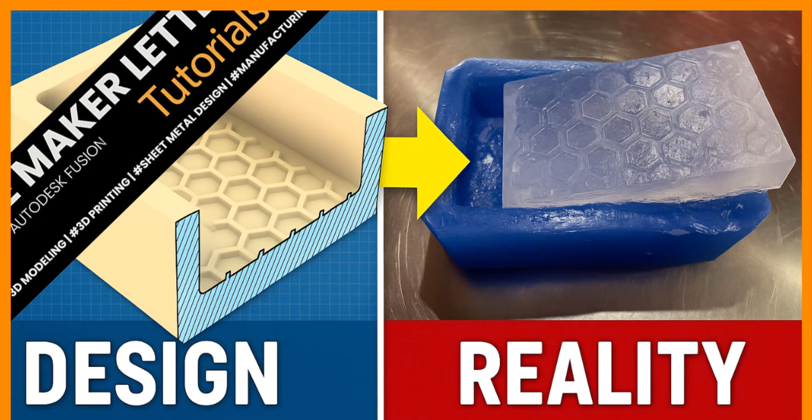Custom molds are fun, and people actually buy them. Today, we're making a silicone honeycomb mold, and I'll show you what I learned along the way.

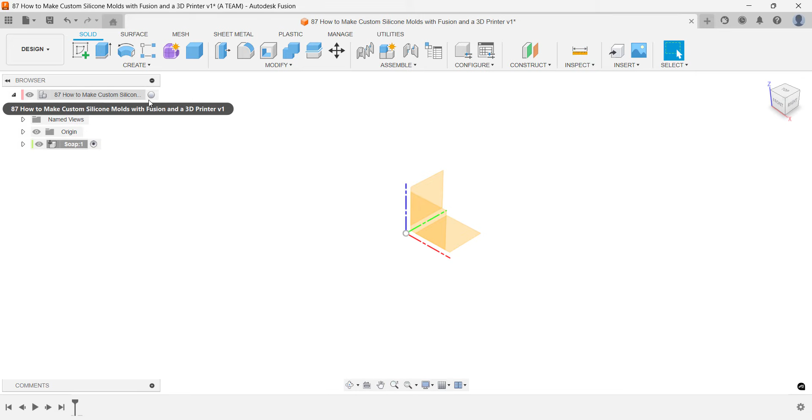Start by following the first rule of Fusion. Create a new activated component for your soap. We'll begin by modeling a digital version of the soap, then move on to designing a 3D printed mold. That mold will be used to cast our silicone mold. And as always, you'll see the keyboard shortcuts pop up in the bottom left corner throughout the project.

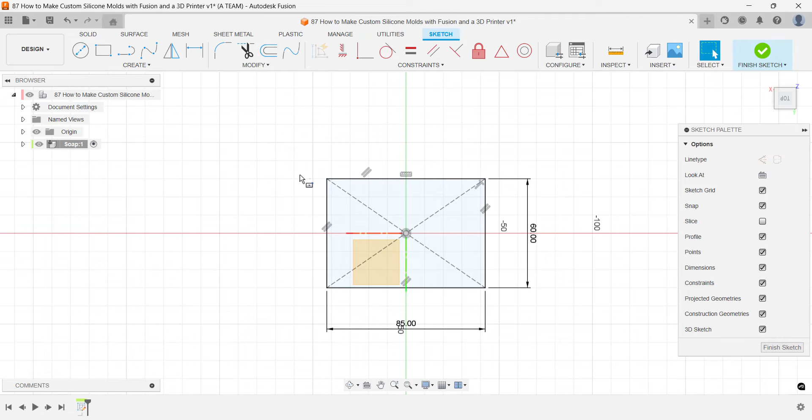Build your design symmetrically from the center of the origin to take full advantage of symmetry. You'll see why this matters later in the project. For this example, I'm making the soap 60 by 85 millimeters, pretty standard dimensions. Set the height to 25 millimeters if you're following along, then confirm the new body inside your soap component.

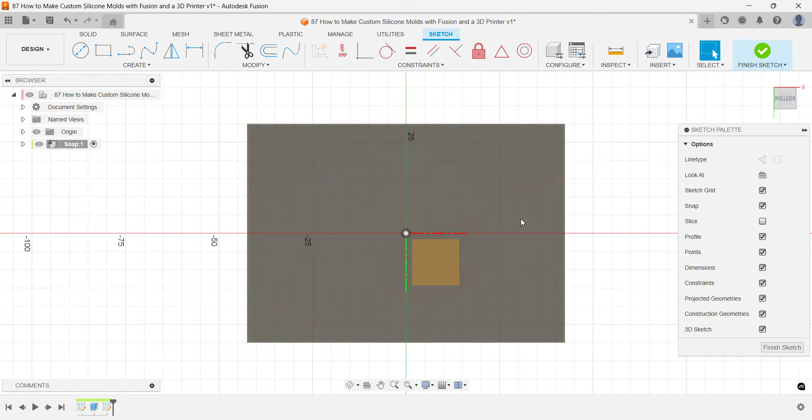Continue with the sketch on the bottom face of your soap component. Use the circumscribed polygon tool to build a honeycomb pattern. It's simple once you know a few tips. A radius of 5 millimeters from the center to the edge feels balanced for the overall soap size.

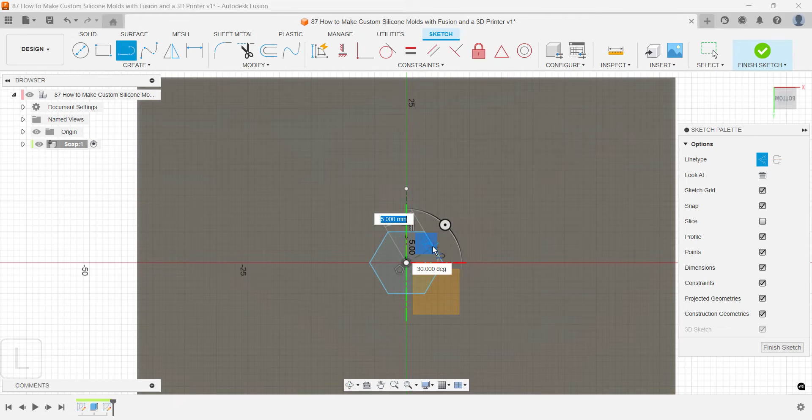Start by sketching one polygon, then add 2 guidelines using construction lines. These are just for direction. They won't be part of the final design. Fusion will snap to the midpoint of a polygon side, giving you a guideline at a 30-degree angle. In the rectangular pattern tool, the polygon is your object, and the construction lines define your directions.

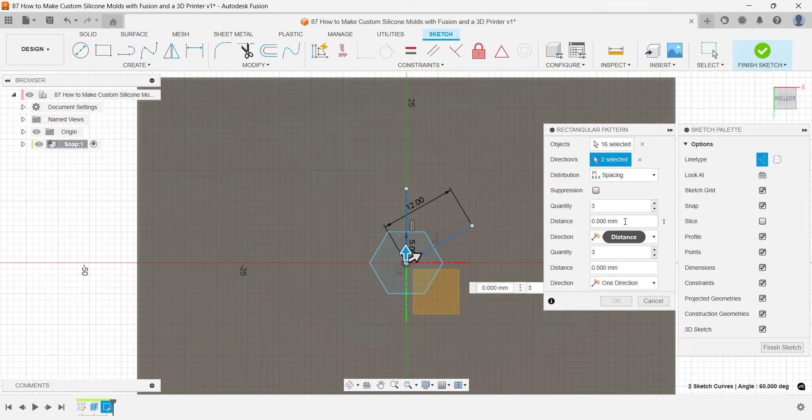Set the spacing to 12 millimeters to keep 2 millimeters between each polygon. Be sure to use the symmetric option so the pattern spreads evenly across the soap. The exact quantity isn't critical, just make sure the soap is fully covered.

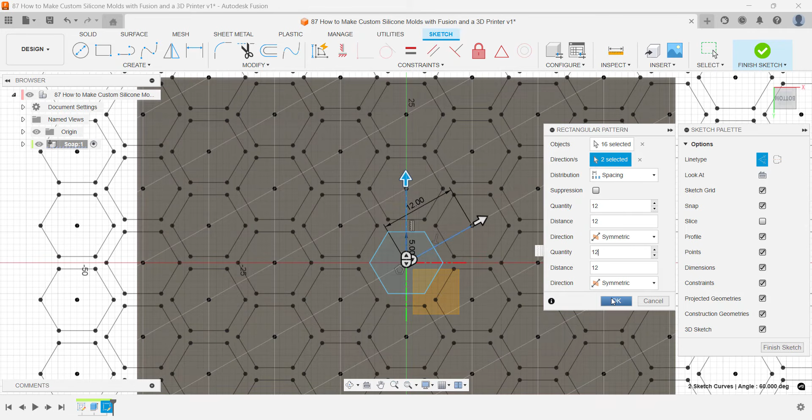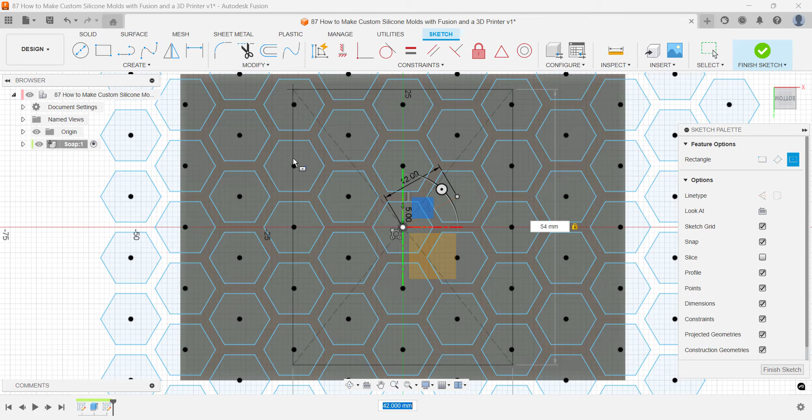Confirm your polygon sketch, then create a center rectangle. Turn off the construction line setting. It's probably still active from when you drew the direction arrows for the honeycomb. I'll size the box at 54 by 79 millimeters. Notice how the sketch turns from blue to black, showing it's now fully constrained.

From here, extrude the honeycomb pattern down 2 millimeters. This cut will emboss the honeycomb into the silicone mold later in the workflow. Pause and orbit your model. Add chamfers to soften the sharp corners. This makes the soap nicer in the hand. It's a choice we'll test in the real world when we cast the soap.

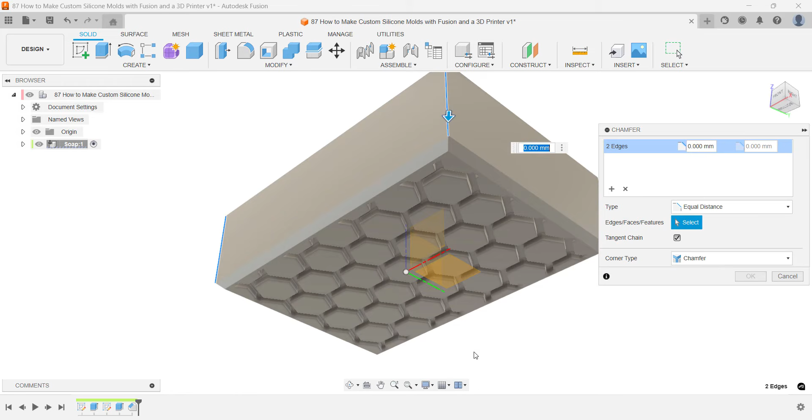Select edges by intent. I'll put the bottom chamfers in one timeline feature and the side chamfers in another. Keeping them separate makes parametric edits simple later. Chamfers, and fillets too, aren't just about looks. They can also add strength depending on the design. For FDM printing, these details matter. In this case, the part is easy to position in the slicer first and then on the printer bed, which makes the whole design straightforward to 3D print.

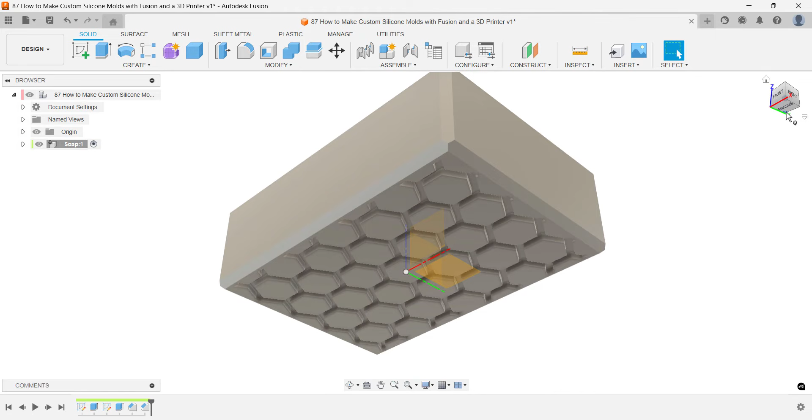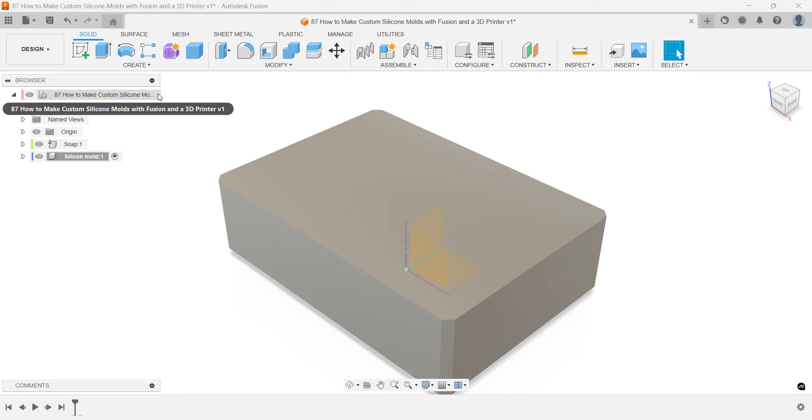Great job keeping up. We've designed the soap component and we'll return to it later. Next, let's design the silicone mold. Switch to the top component before creating the silicone mold component. This keeps it at the same level in the browser instead of as a subcomponent. Sketch the silicone mold on top of the soap. Instead of redrawing, project the soap outline so changes stay linked.

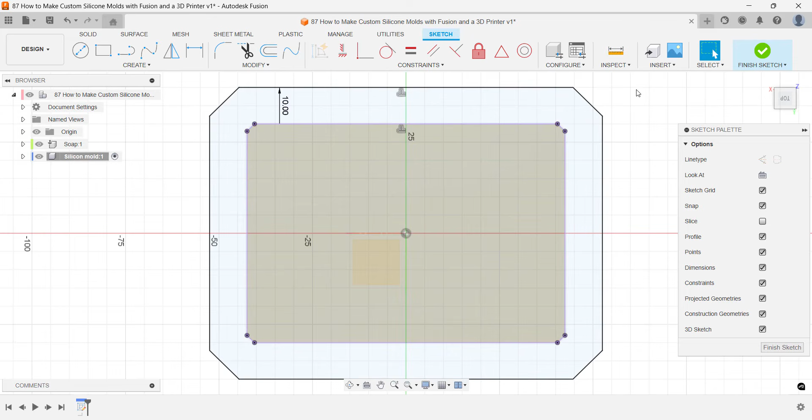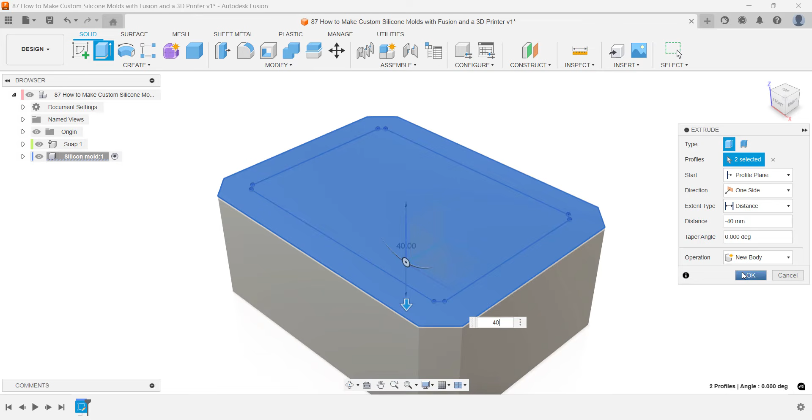The mold must be larger, so I'll offset it 10 millimeters. A solid thickness for silicone. If you can go thinner without losing strength, that saves material and cost. Extrude the silicone mold so it fully covers the soap with the margin at the bottom. It's fine that the mold now encloses the soap. This is intentional. Since the real soap will be cast inside the mold, we'll handle that next.

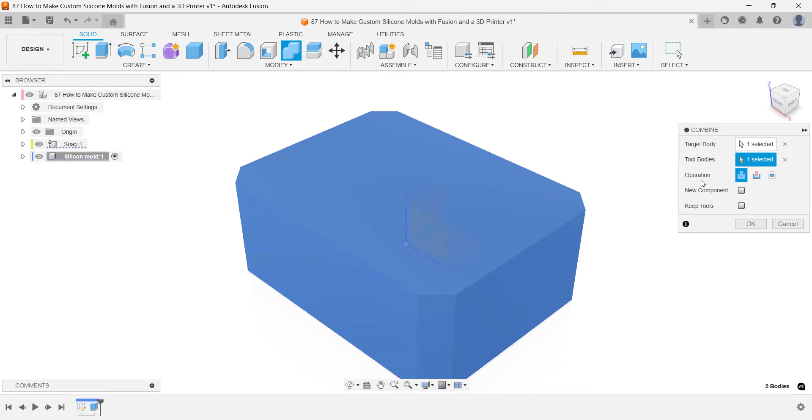Use Combine for this step. Set the silicone mold as the target body, then press hold to pick the soap as the tool body. Choose Cut and check Keep Tool so the soap remains for later use. You won't see the result right away with both components visible. Toggle off the soap and you'll see the mold now has a clean cavity ready for casting.

Great progress. Next, we'll build the 3D printed part used to cast the silicone mold. Switch to the top level in the browser and create a new component. I'll call it Mold Base.

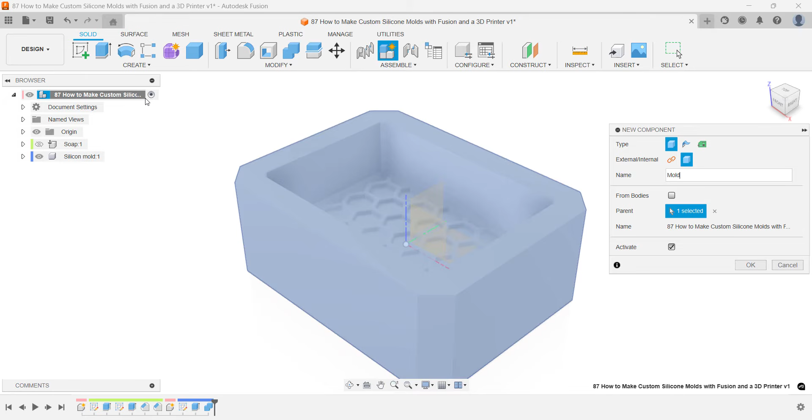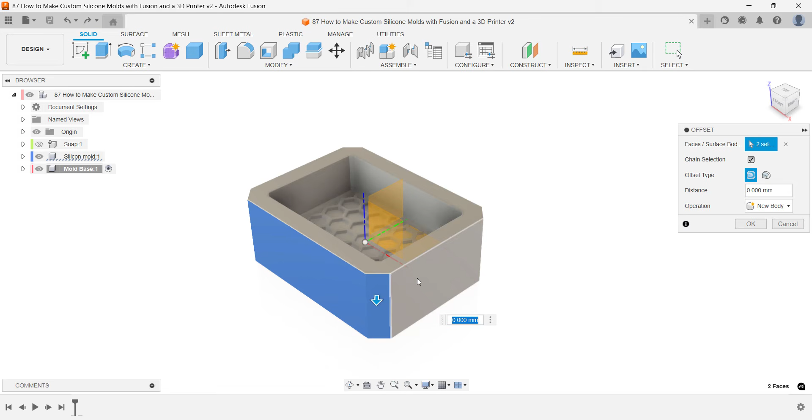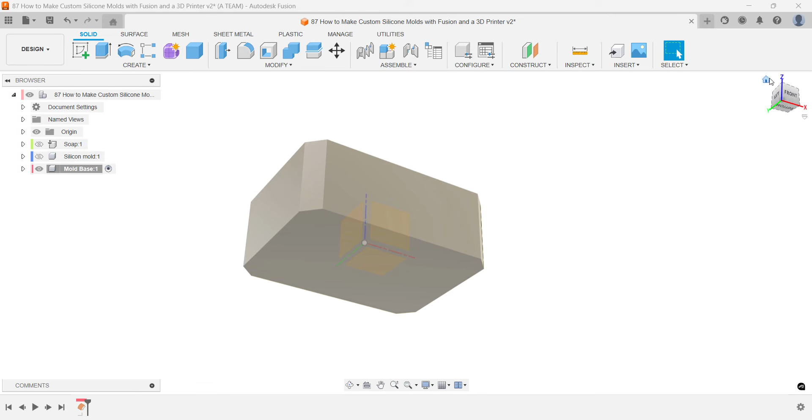Save your project now, then we'll build the mold base starting with the Surface Offset command. Use the Surface Offset tool to offset all faces of the silicone mold as the starting point for the mold base. This keeps the design parametric, so earlier changes update the mold base automatically. Use Orbit to reach all sides and set the offset to 0 mm. As with the Combine cut, turn off visibility to see the result. You now have a surface with no thickness ready to develop into the mold.

Give the surface a thickness. I'll use 10 mm for a solid mold. If you find a thinner option that still works, share it in the comments. Thinner walls mean faster prints.

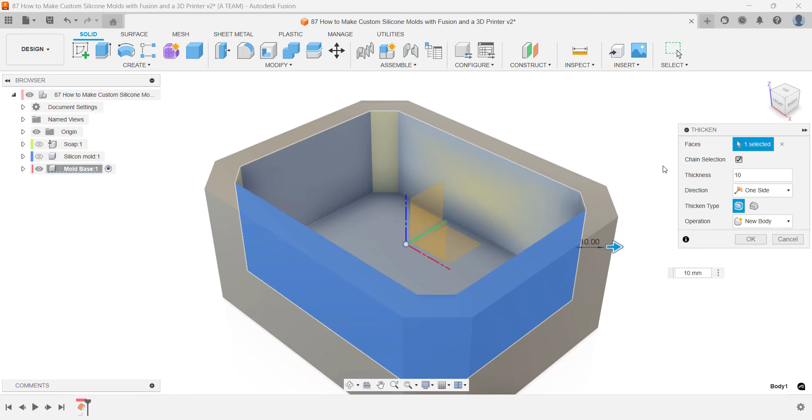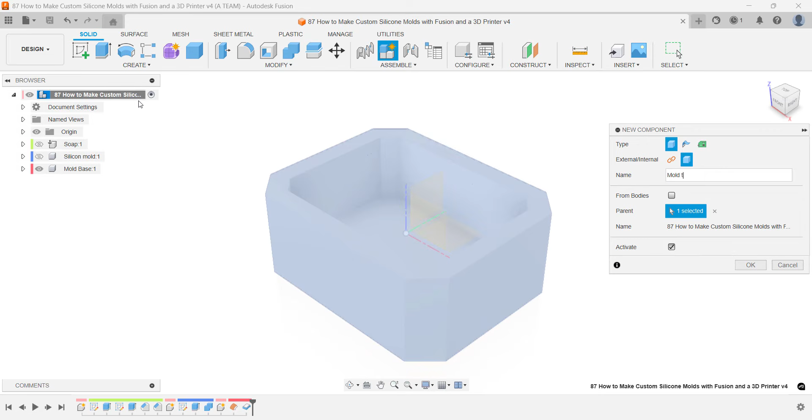Turn the silicone mold back on for a quick check. You'll see it fits neatly inside the 3D printed mold. With this step done, we're ready to move on to the final part. We'll keep it simple and name this component Mold Top. This part is essential for casting the silicone mold. We'll design it on top of the soap component, since the soap is needed in the casting process. Later, you'll also see how this step highlights one of the less obvious advantages of working with components.

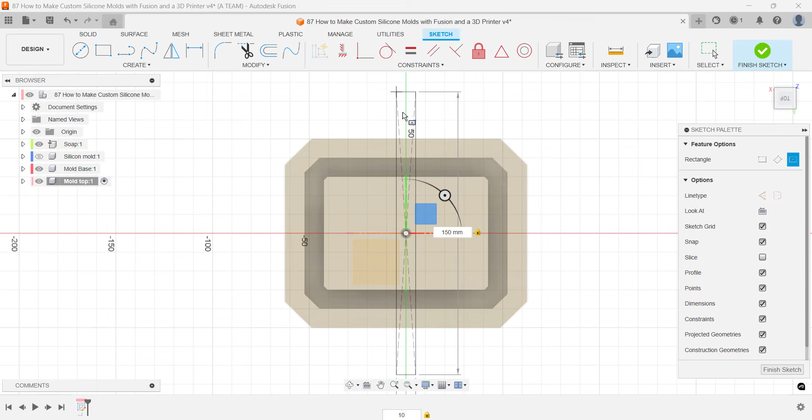The purpose of this step is to create a way to attach the soap and mold top components to the mold base when casting the silicone mold. We'll keep the prototype simple by skipping screws. I'm over-sketching here for speed and will refine the details later in the solid modeling environment. A thickness of 10 mm is a good first estimate, balancing strength and speed. Since this is the first iteration, we can refine it later if needed.

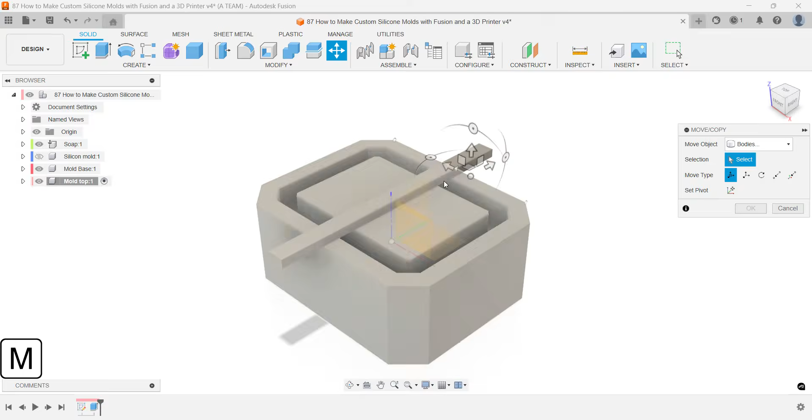Create a copy of the part and rotate it 90 degrees. From here, it's easy to use the Extrude command to adapt all sides of the mold top to the mold base.

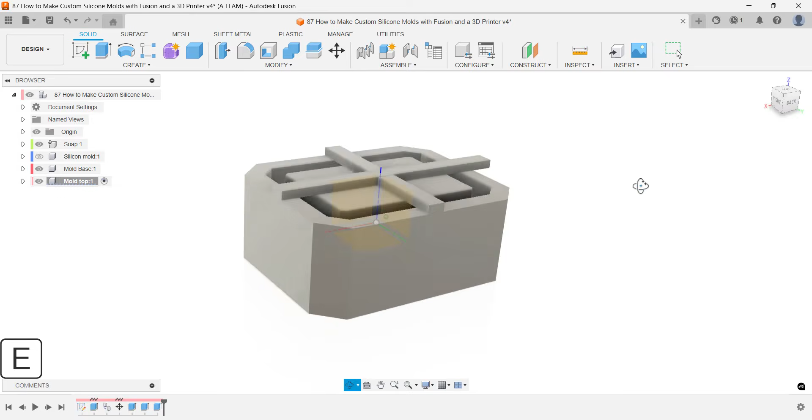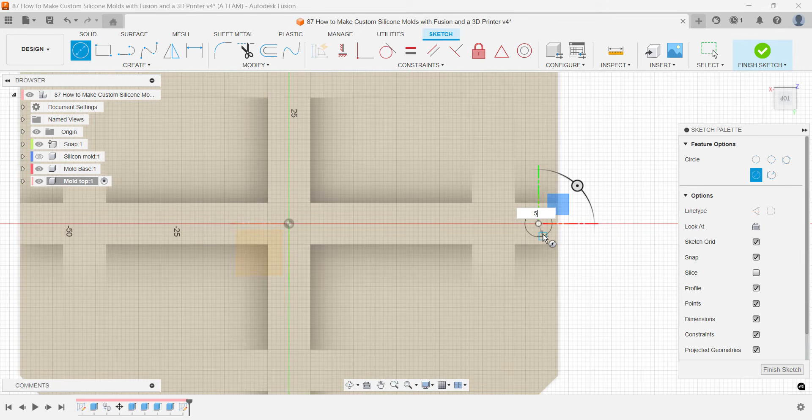Next, we'll add cylinders to position the mold top on the mold base with accuracy. Without them, it would be hard to align and keep the mold top in place during casting. Sketch a 5 mm circle and use dimensions to position it relative to the edge of the mold top.

Fusion suggests an extrude cut by default. While we do need a hole in the mold base, we also need this cylinder. Switch the operation to new body for now, we'll come back and create the hole in the mold base later.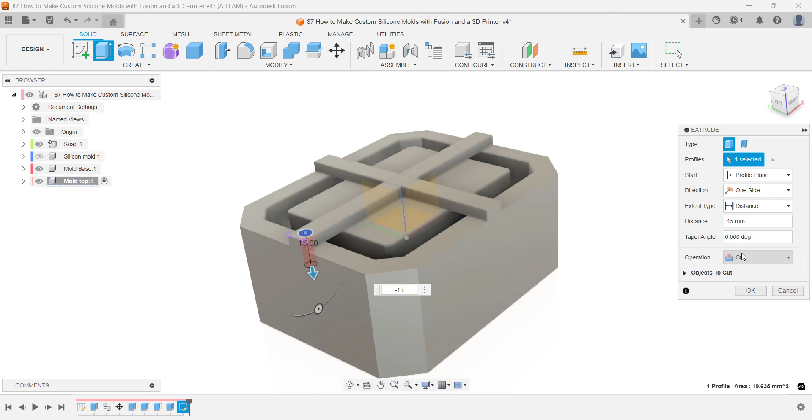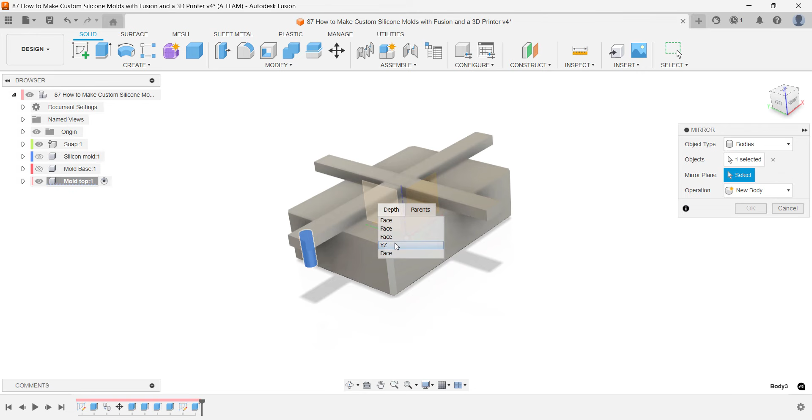Since we're working symmetrically around the origin, we can use the default construction planes to mirror the cylinder to the other side. Press and hold the left mouse button to select the construction plane from the pop-up menu. The mirrored cylinder appears instantly in the right place, and any updates earlier in the parametric timeline will automatically carry through.

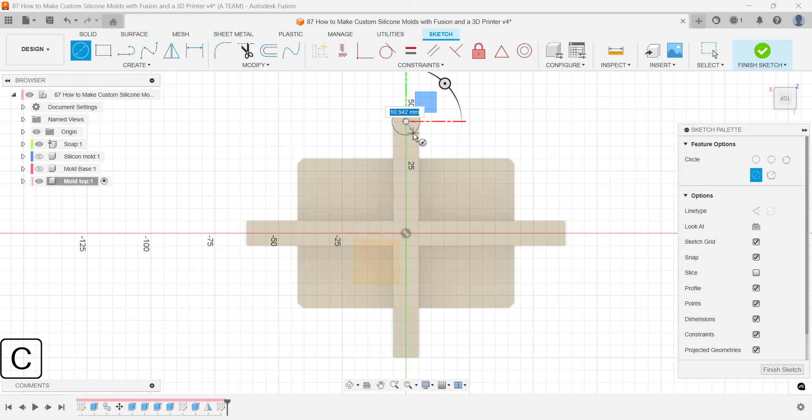Repeat the process for the remaining 2 cylinders. While doing this, consider alternative workflows. With a symmetrical design, you could use a single sketch and apply a circular or rectangular pattern. Another option is to copy and paste the bodies into place. Choose the method that fits your style and ensures accuracy. Personally, I prefer this workflow since dimensions and mirroring make correct positioning easy to guarantee.

Another tip worth reflecting on is the mouse you use. Orbiting around the model or selecting objects hidden behind others are good examples of why a mouse with at least 2 buttons and a scroll wheel makes your workflow much faster and more efficient.

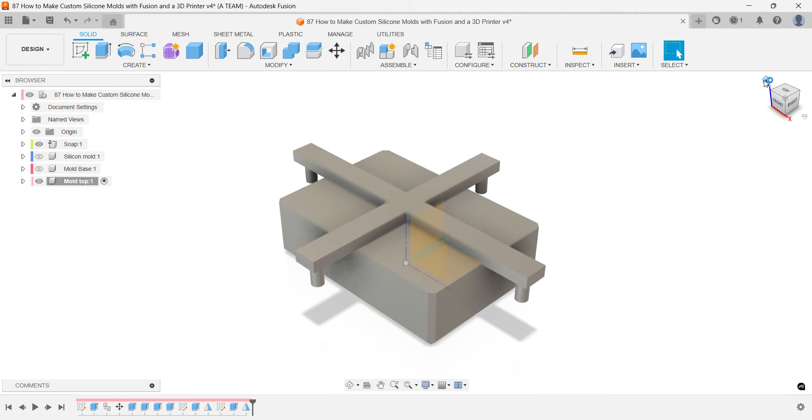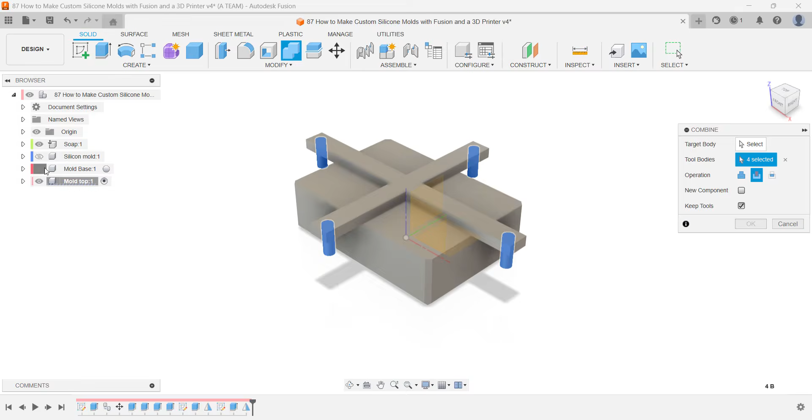Now it's time to cut holes in the mold base with the Combine command. Select the 4 tool bodies, set the operation type to cut, and check Keep Tools. Turn on the visibility of the mold base and set it as the target body. Hide the mold top component to review the results. The clearance around the holes looks a bit thin, so we'll refine them further in the next step.

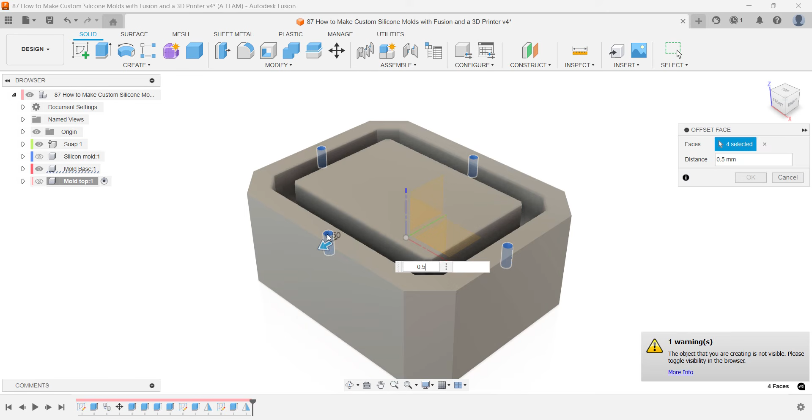The Offset Face command lets us push the walls outward. I'll set the offset distance to 0.5 mm, though you can go thinner depending on your nozzle size and 3D printing setup. With this small clearance, the cylinders will slide into the holes without issue.

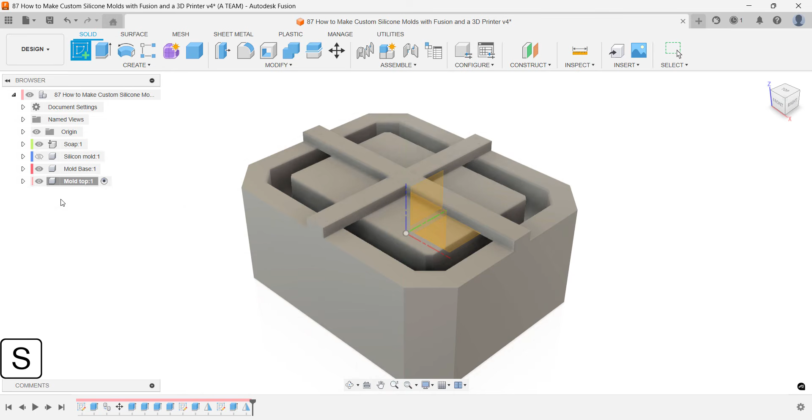We're in the final stage of the design, and this next step is critical. We'll 3D print the soap component and the mold top together upside down because of the honeycomb pattern at the bottom. To make this printable without supports, we'll flatten the top surface. Use the project command to capture the soap's geometry. Then extrude the projection as a join operation.

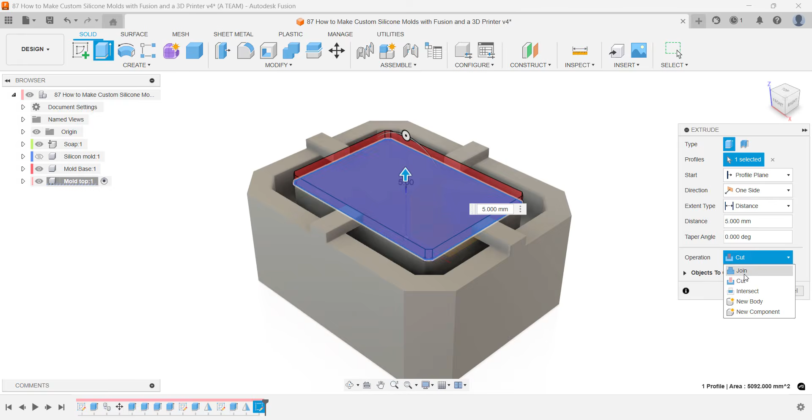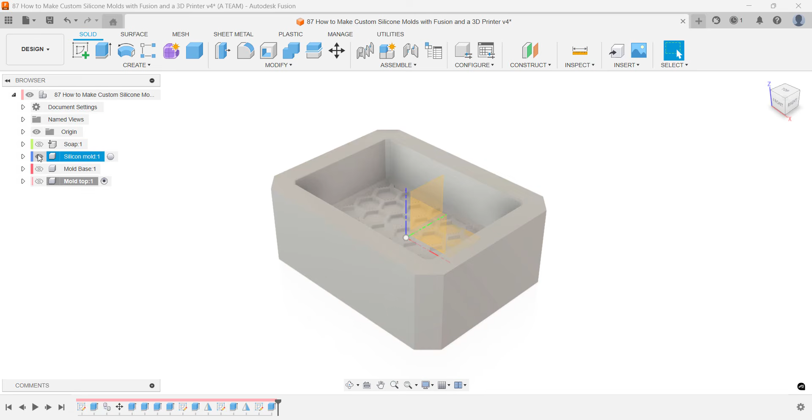Before exporting, let's recap how everything fits together. The silicone mold will be used to cast the soap. To make that mold, we'll rely on the 3D printed mold top, mold base, and soap component. A section analysis is a great tool here, letting us see exactly how the parts align and work as one. Keeping the components visible shows exactly where the silicone will be poured into the 3D printed mold. The colors in the browser match the hatch colors inside the components, making it easy to read.

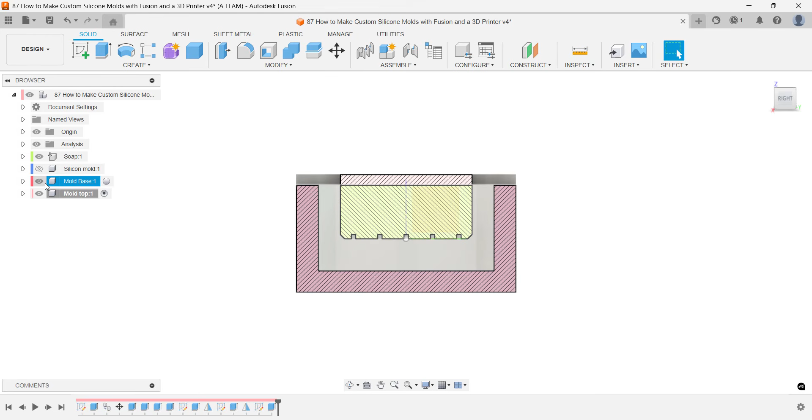You can leave the section analysis on while toggling visibility in the browser, then turn it off when you're done and return to it whenever needed. We'll use 2 different export workflows worth knowing. The mold base is simple. Right-click it in the browser, choose Save as Mesh, set the format to STL, and then save the file to your chosen location.

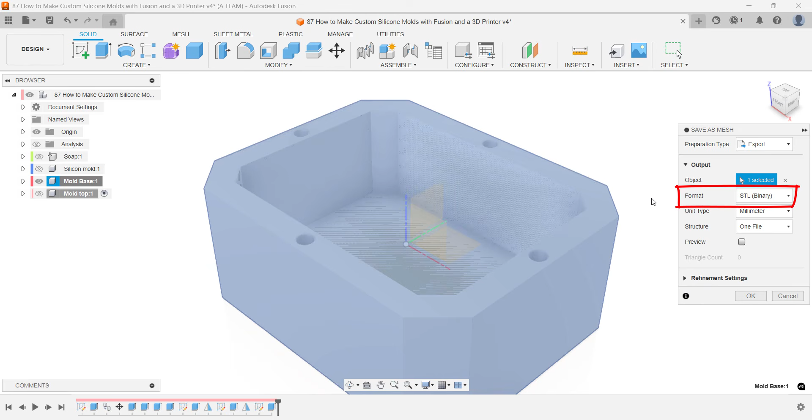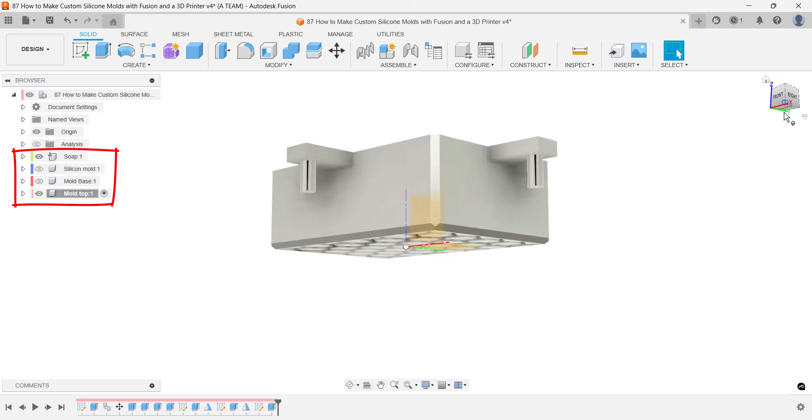The second part we'll 3D print is the soap component and mold top combined into one print. To export them as a single STL, first save your project. Then toggle on their visibility in the browser, turn off all other components, and go to the drop-down menu in the top left corner to export. Make sure to switch the file type to STL before saving it to your chosen location.

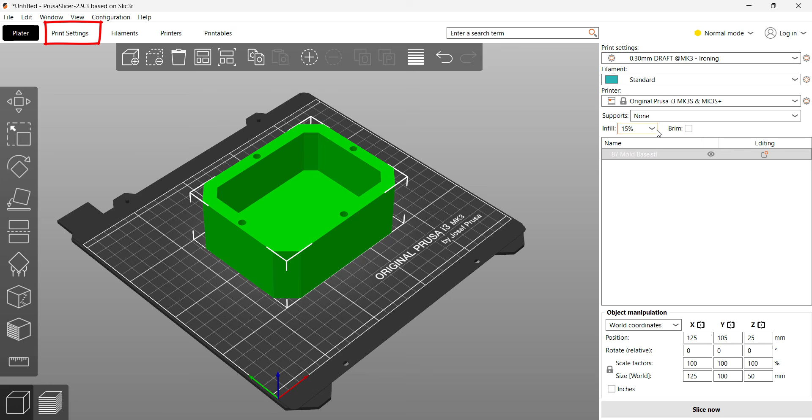It's easy to set up your 3D prints in PrusaSlicer. The mold base imports in the correct orientation, so setup is quick. I enabled ironing in the print settings to smooth out the top layer and reduce visible lines. It adds print time, but the quality is worth it. For infill, I used 15%. The mold didn't leak silicone, so there's no need to go higher. More infill only slows the print.

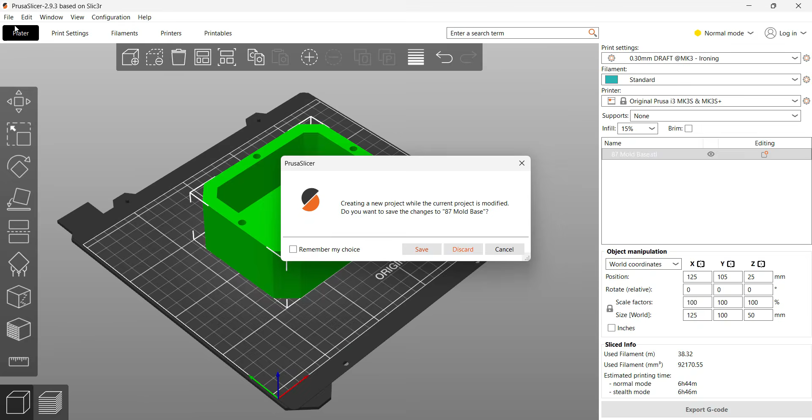With these settings, the estimated print time was 6 hours and 44 minutes, though it would be faster on a newer 3D printer than my original Prusa i3 MK3S+, which I've had several years. Before slicing and generating G-code, flip the combined mold top and soap component upside down. I used my new preset with ironing for this part as well, which helps reduce visible lines on the 3D print, the silicone mold, and eventually on the soap.

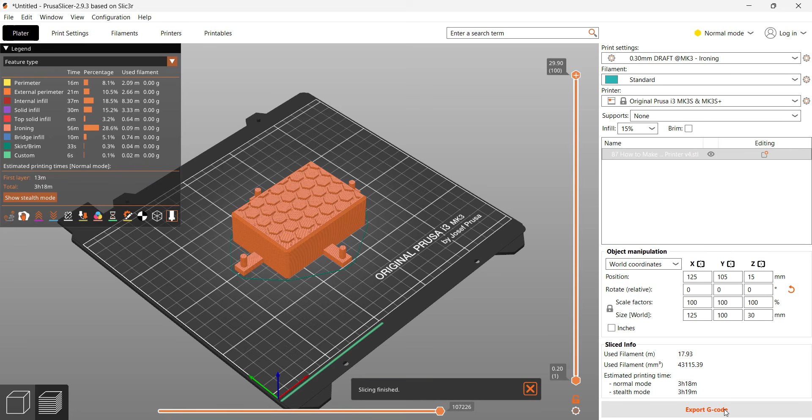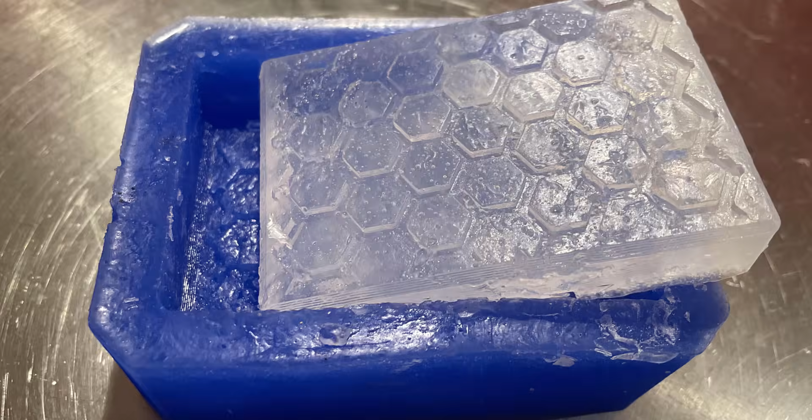The finished soap turned out great for my first soap mold project, and there's definitely potential here for both hobbyists and small businesses. Next time, I'll place something inside the 3D printed mold to make it easier to remove the silicone without damaging the print. For the silicone and soap casting, just follow the instructions provided by your supplier.